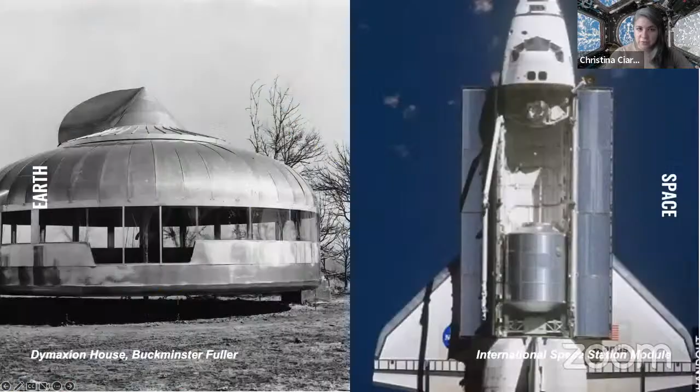How much does your building weigh? I started with this question from Buckminster Fuller. While it's a true and real logistical concern for the launching of a habitat and the weight of its payload for a spaceship, it's also a prompt for architects on Earth to question just how much material it has taken to construct our buildings. Have we been efficient with our materials? Have we tread on the Earth lightly? Did we leave a small footprint, whether that's a carbon footprint, water footprint, or some other footprint?

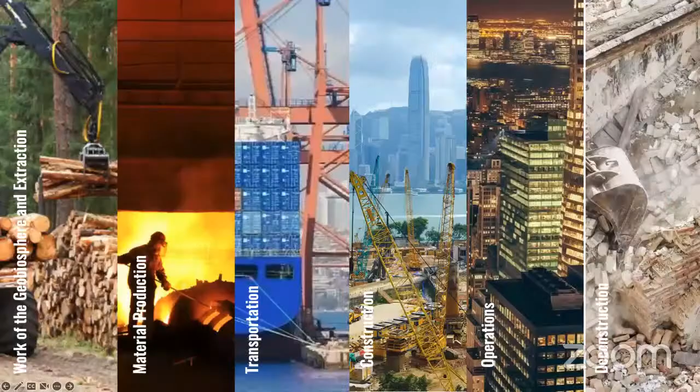You may have heard a great deal of discussion lately on carbon emissions and the need to reduce the carbon footprint of the built environment. For the building industry, this means thinking more deeply about the relationship to the material cycles of our planet and the means and methods which have dominated the way we source and build buildings.

From the work of the geobiosphere to make and produce raw materials, whether that be renewable materials such as timber, or non-renewable materials such as crude oil, irons, and metals. This is not just extraction through smelting furnaces or glulam factories, but transportation across material supply chains, supplied by faraway fossil fuels, with air refreshed from distant forests—resources that include both material energy to construct as well as to operate and support human life, both the necessary inputs and waste energies.

It's almost strange that the building industry here on Earth has only recently come across the need to use so-called life cycle analysis—the accounting of all the impacts of our building material production, construction, operational, and disposal practices. For what seems like quite a long time, we've been unconcerned with what is upstream of our design intent, taking for granted the standardization of materials and methods that make up current practice. Only recently have we begun accounting for all of these parts of our system.

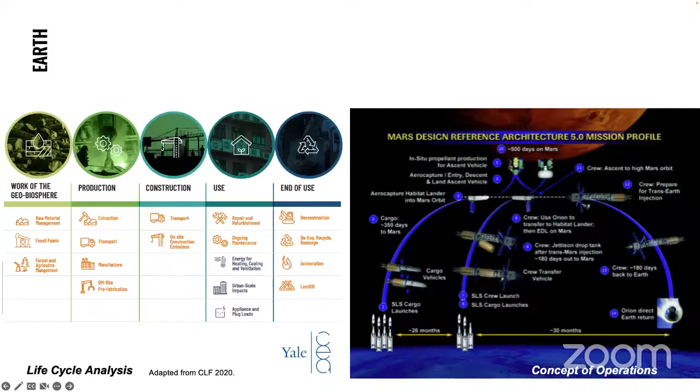Perhaps separated from the immediacy of connection to our resources—material, water, air, and biomass—we have forgotten our fundamental interdependency with the planet. And having forgotten it, we've continued to build as usual with extractive and energetically intense properties in a way that turns out is not sustainable. As we move further and further from our planet without the possibility to continuously resupply, architecture and building suits will need to be surrogates for all of the resources of an entire planet.

What we can say is that design for space is creating a human environment that operates within limited means and resources. This design exercise will provide feedback for Earth buildings, which must also act as though materials, energy, and resources were limited, which they are.

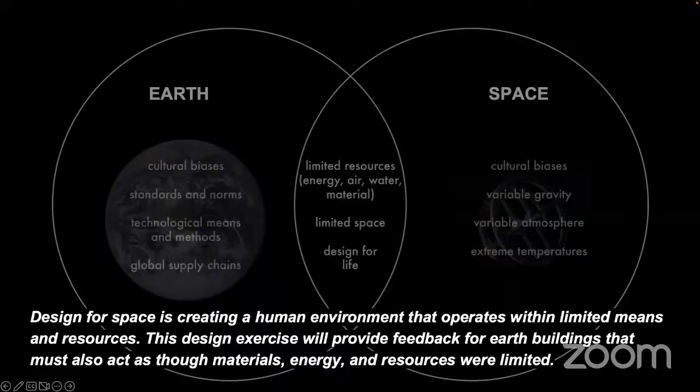In space, we come face to face with design requirements not unlike the sustainable drivers we're called on to respond to on Earth today: responsible consumption and production, clean water, sustainable cities, and smart communities. Our space habitat should be everything we hope to achieve in our terrestrial buildings, and it will be responsible for creating a circular economy in terms of clean air and water, food and waste recycling, and creating healthy environments for humans.

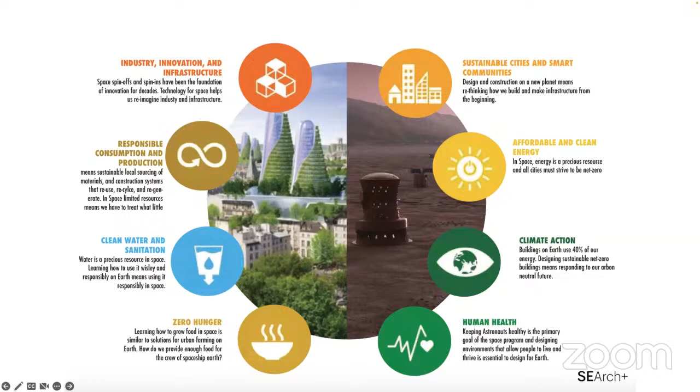So what I want to do with you today is a two-part presentation. The first part is to walk you through some of the highlights of the report that Sandra mentioned, Building Materials and the Climate, Constructing a New Future. Then I'll talk a little about why I think these same design principles are applicable to space applications, and what terrestrial architecture seeking to reduce its carbon impact on this planet means for space architecture, and what space architecture can teach us for Earth.

I'll start with the report and say that I'm one of many authors on this report. It was developed by the United Nations Environment Program, the Global ABC (the Alliance for Building and Construction), the Yale Center for Ecosystems and Architecture, and other partners. So we have a large team of industry experts, academics, and policymakers all responsible for this. I'm just one part of many, but I'm very thankful to be on that team.

So carbon, why are we so interested in carbon? Carbon compounds regulate the Earth's temperature, make up the food that sustains us, and provide energy that fuels our global economy. Most of Earth's carbon is stored in rocks and sediments. The rest is located in the ocean, the atmosphere, and in living things like trees. These are the reservoirs through which carbon cycles.

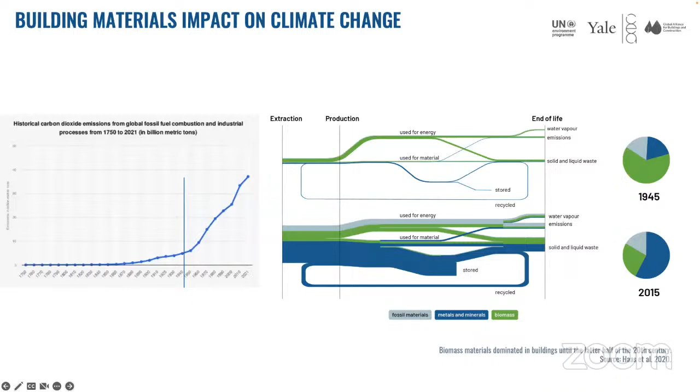Increases in carbon in the atmosphere are largely consistent with increases in industrial production and the use of fossil fuels. In the building sector, we can see that since 1945, we have dramatically increased the use of fossil materials, minerals, and metals proportionally, as well as overwhelmingly increased the volume of materials we use in construction in general. So we're both increasing the quantity of construction and shifting away from bio-based renewable materials to non-renewables.

As the world economy expands and living standards rise, the global use of raw materials is projected to nearly double by 2060. Under a business-as-usual scenario, floor space worldwide is set to double by 2060, and every 5 days, the world constructs enough new buildings to add another city the size of Paris.

Given the increasingly furious pace and scale of global construction, the challenge of shifting away from carbon-intensive materials and methods often seems daunting and potentially impossible.

But it's important to recall that even in the very recent past, building materials were not always carbon-intensive. Up until the mid-20th century, global material flows were extracted overwhelmingly from renewable biological sources such as forests and agricultural processes. By the late 20th century, a preponderance of metals and minerals constituted the most used materials for the first time in human history.

Just three materials, concrete, steel, and aluminum, are responsible for 23% of overall global emissions today.

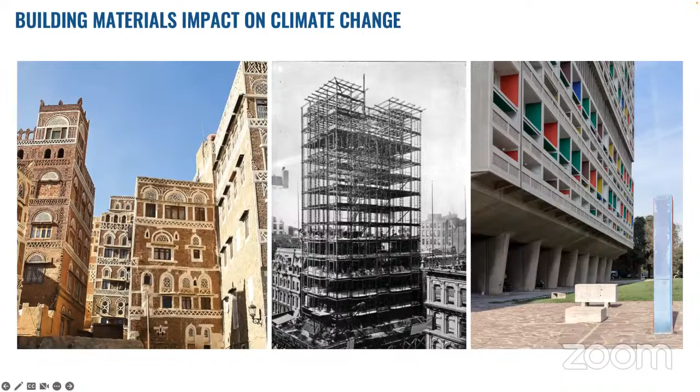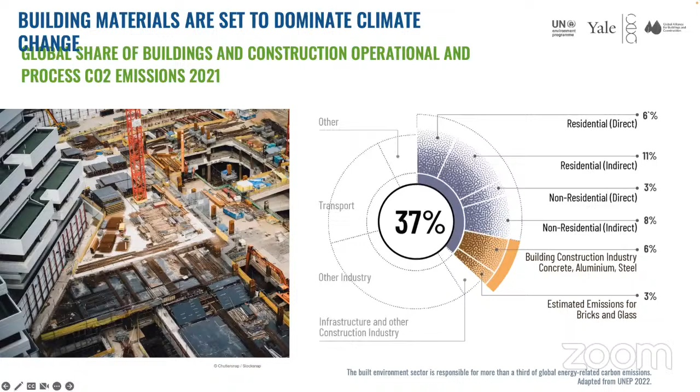The building sector is responsible for 37% of carbon emissions, both embodied and operational. Embodied carbon refers to emissions created from the production of materials, while operational carbon is the energy used to heat, cool, and ventilate our buildings and run electricity in them.

While overwhelmingly the focus has been on operational carbon and increasing energy performance in our buildings, because of that attention we are reducing operational carbon emissions. But at the same time, the percentage of emissions that have to do with embodied carbon is increasing.

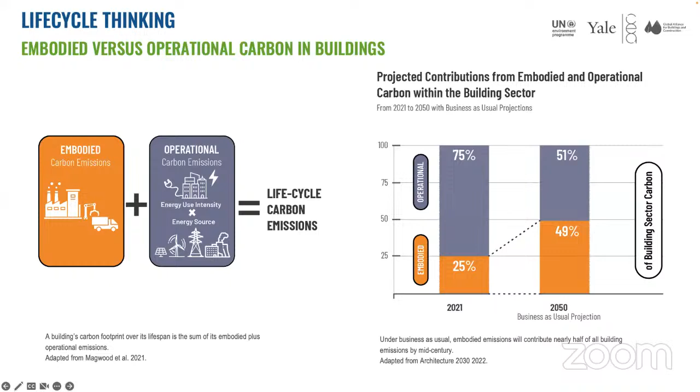So that's something we're able to sort of take a grasp of, but at the moment the building is constructed, that's when we really use the most of our embodied carbon.

It's really important to start thinking about the whole life cycle of the building. I think if there's one way of thinking that is most parallel with space architecture, it's this idea of life cycle thinking about everything from the time we extract all the way to the end of use or reuse, and where things are going.

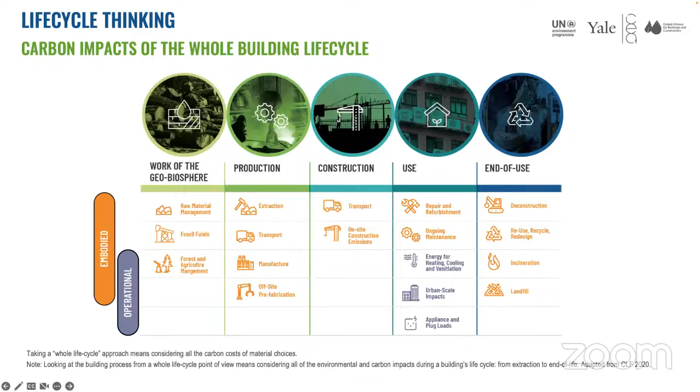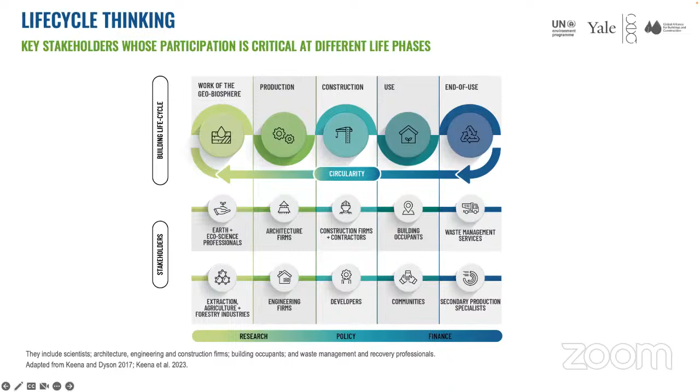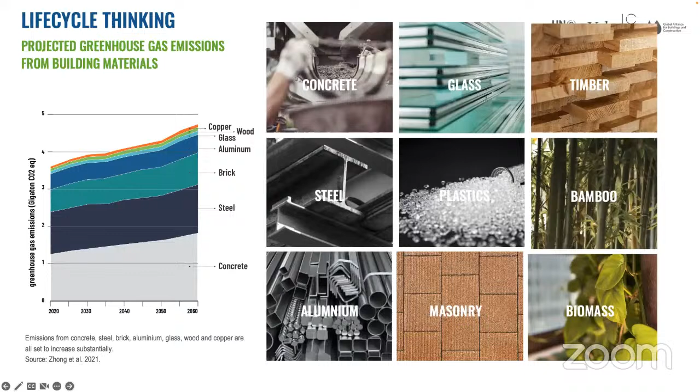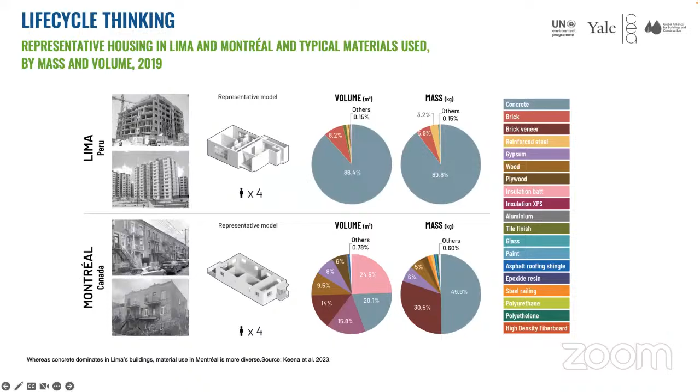There are many material streams relevant for the built environment, and we analyzed a few of them. As mentioned, concrete, steel, and brick are really the largest contributors. If we look at examples from a few different regions, we can see by both volume and mass that they are also the heaviest, and really make up the superstructure of the building. Superstructure is really where most of our carbon cost is coming from.

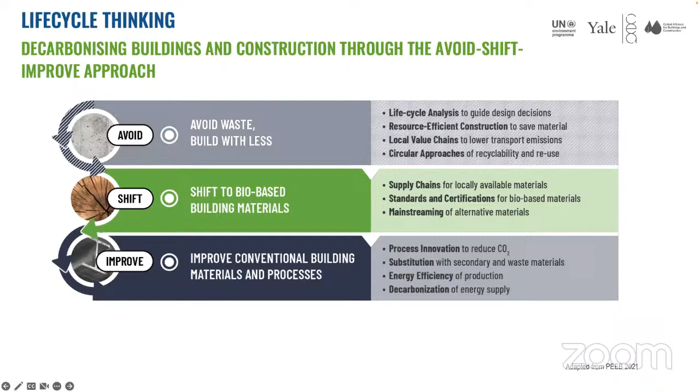In our report, we took an avoid, shift, improve approach. We are avoiding by building with less and building less. We're shifting to bio-based building materials, which are lower carbon, renewable materials, and we are improving conventional materials and building processes, trying to use the non-renewables we do use frequently in new and improved ways. We call this the avoid, shift, improve approach.

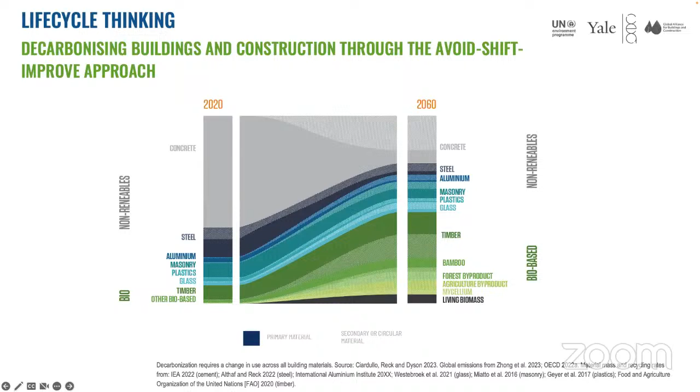As you can see, we're projecting a scenario in which we use significantly less non-renewable materials, and when we do, we're using them in a circular way—either design-for-disassembly concrete, recycled steel, recycled aluminum, or reused masonry. At the same time, we're projecting an increase in bio-based and renewable materials, but also in a circular way, not to repeat the problems of the past and continue with a linear economy for biomaterials, but really a circular economy for biomaterials.

A circular economy in buildings means transitioning away from the take, make, waste paradigm to reuse, repair, and recycle. In a circular economy, extending a building's life is the most valuable and least wasteful option.

First, reuse the buildings. The next best case scenario is to reuse components. This is substantially easier if design for disassembly has been incorporated into the early design stages of a building's construction, allowing for easy dismantling of materials and components so their value is retained. The next option is material reuse and remanufacture if needed, which prevents the need for extraction of non-renewable minerals for new material manufacturing, reducing embodied carbon.

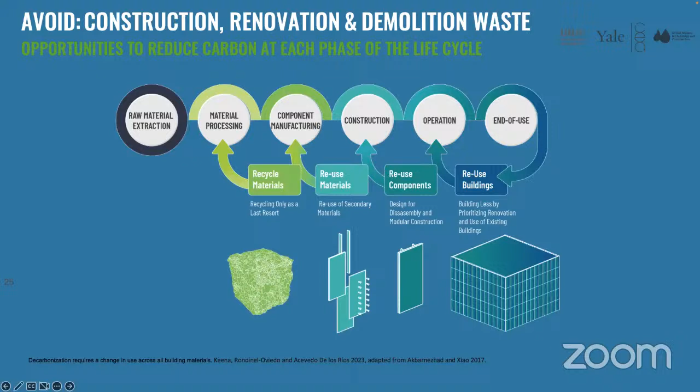In a circular economy paradigm of reuse, repair, and recycle, where waste is eliminated, the practice of recycling or downcycling becomes a last resort, as it is typically a product of lesser value.

There are opportunities to reduce carbon at each stage of building development. As with many things in sustainability, the potential to avoid is greatest during the planning and design phases. The first question is whether anything new needs to be built at all. Alternatives to new construction could be explored for existing buildings, which is the case for most mature economies, where a majority of the building stock already exists. Increasing the use of existing assets and promoting renovation and adaptive reuse is key.

In contrast, in emerging economies, much of the building stock is yet to be built. In this case, where new construction is a necessity, design should aim to maximize building lifespans through modular construction, incorporating design for disassembly, and promoting resource and material efficiency.

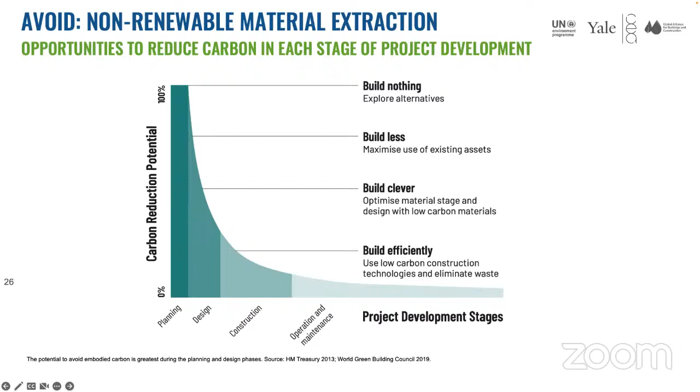At the end of life of buildings, the most common waste management strategy is demolition, followed by disposal of materials in a landfill. However, this results in a loss of invested carbon accumulated over the building's lifespan. Of the roughly 100 billion tons of construction, renovation, and demolition waste generated annually, around 35% is sent to landfill on average. So diversion and innovative management can greatly reduce waste.

Just to say that we can think about the idea of buildings being future material banks. So when we think of the lifespan of a building, 100 years, 200 years, think about the potential to use those as material banks for the future.

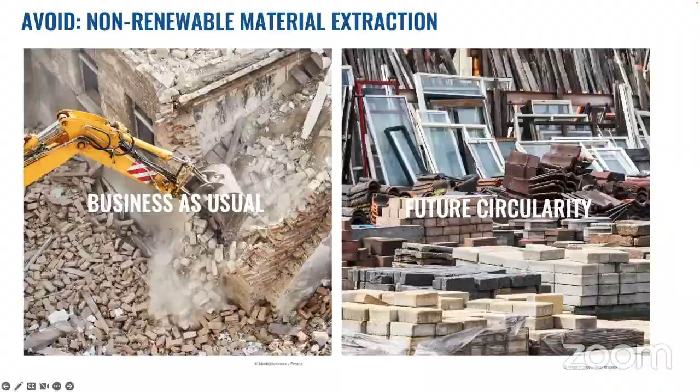Concrete is by far the most widely used construction material in the world, and it's responsible for the most embodied carbon in buildings. It's experienced tenfold growth over the past 65 years, compared with a threefold increase in steel production.

In many applications, concrete is used when lower carbon materials could suffice, largely because concrete has developed supply chain and infrastructure with ease of use and calculation. It's just the easiest thing for us to do. Many concrete buildings of less than 12 stories could shift to bio-based structural assemblies for everything but the foundation, if sustainable materials were available.

Cement is the binding material in concrete, typically comprising around 10 to 15% of the total. And cement is by far the most carbon intensive to produce within concrete. Cement production alone accounts for 7% of global CO2 emissions total. So not 7% of the building industry, but 7% of emissions total from the production of cement, the binder in concrete. It's also considered to be one of the most difficult processes to decarbonize.

This is because the majority of carbon emissions are released in the chemical process of converting limestone to calcium oxide. And so there's an urgent need to substitute these conventional cements with low carbon alternatives, such as byproducts from industrial, agriculture, forestry, and energy sources.

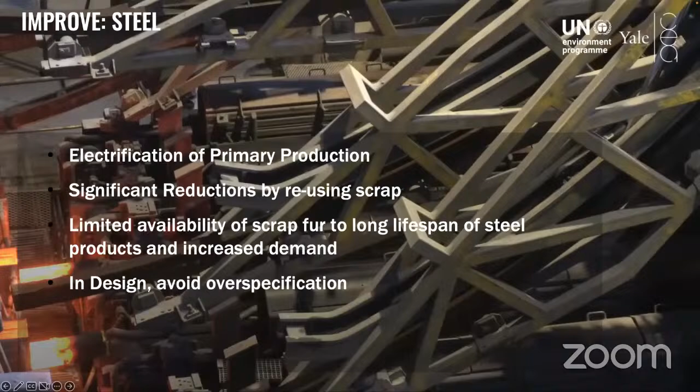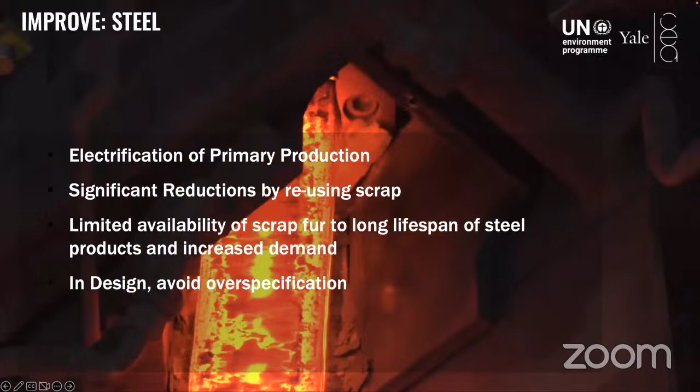Steel is the second most abundant material used in buildings, and steel production is responsible similarly for 7.2% of global greenhouse gas emissions. Most emissions are generated during three processes: when steel is produced from primary raw materials using a blast furnace, when carbon is needed as a reducing agent, and from the energy used to heat the melt.

The most significant strides in decarbonizing steel are electrifying the primary production, using renewable electricity, ideally hydrogen, to produce the steel. The biggest challenge to using secondary steel production, recycled steel, is the limited amount of scrap. There's a large gap between the supply of recycled steel and the rising demand. This is because steel is used in buildings for a long time, greater than 20 or more years, and there's rapid growth.

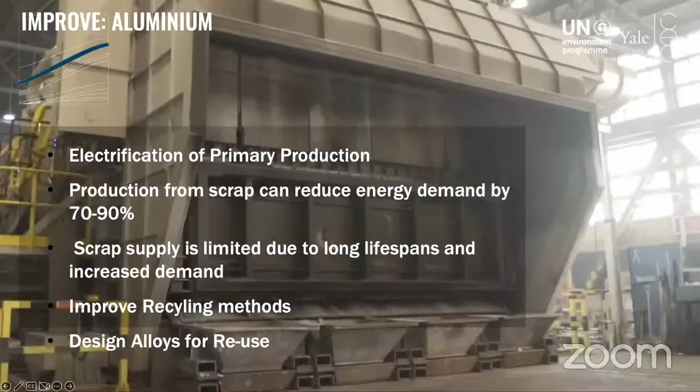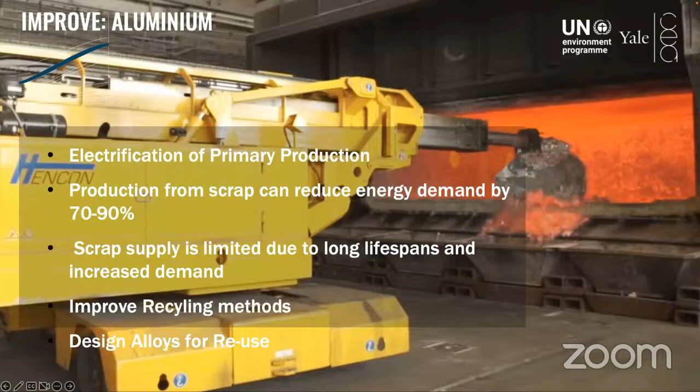So we have less steel to be able to mine for recycled content. In aluminum production, it contributed to over 3% of the world's direct emissions. Producing aluminum requires smelting, which is by far the most energy intensive step. But this also means that producing aluminum from scrap can reduce the energy by 70 to 90%. So the most significant thing is to focus on the reuse and recycling of aluminum.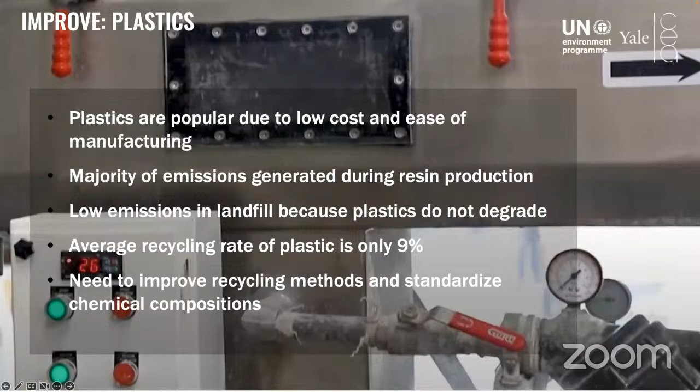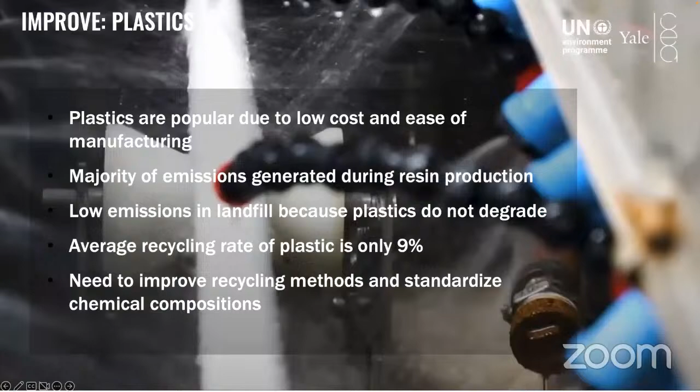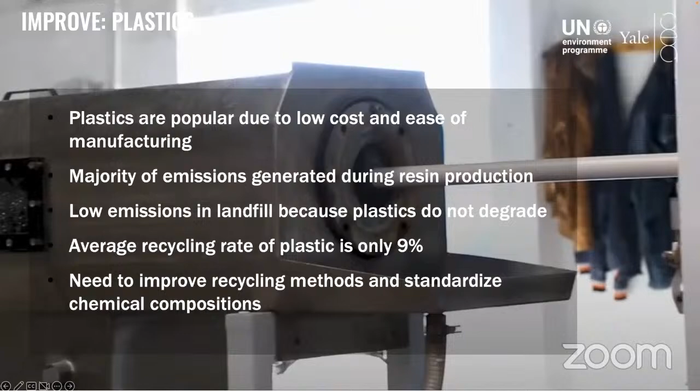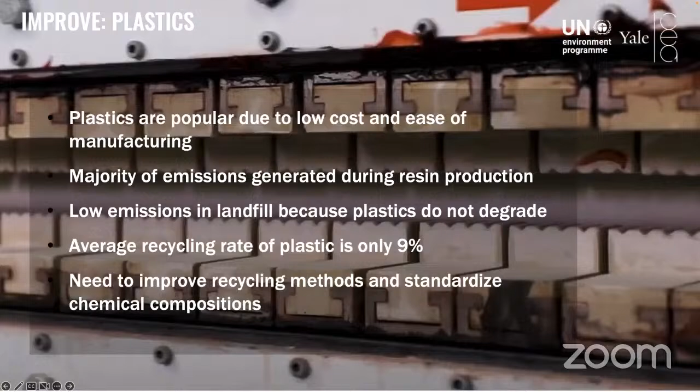Plastics are ubiquitous and popular due to their low cost and ease of manufacturing, typically used in buildings for piping, windows, and insulation. Recycling offers an opportunity to reduce the demand for new petroleum-based plastics, but the average rate of recycling is only 9%. Plastics' low cost and ease of manufacturing have resulted in many different chemical compositions that pose technological challenges during recycling. So it's harder to recycle a wide range of non-standard chemical mixes. Low plastic recycling rates need to be addressed through both the standardization of chemical compositions and improved practices.

To talk a little bit about masonry, at the end of the 20th century, structures made of earth-based materials housed around a third of the global population. And since then, it's fallen to only 8 to 10%. I believe a lot of the buildings that you may live in and that have stood the test of time are still made out of masonry.

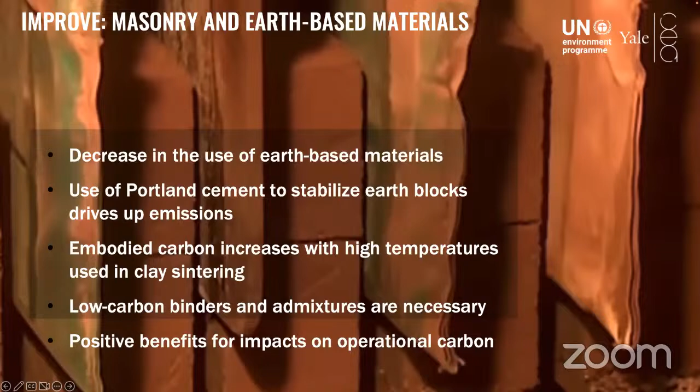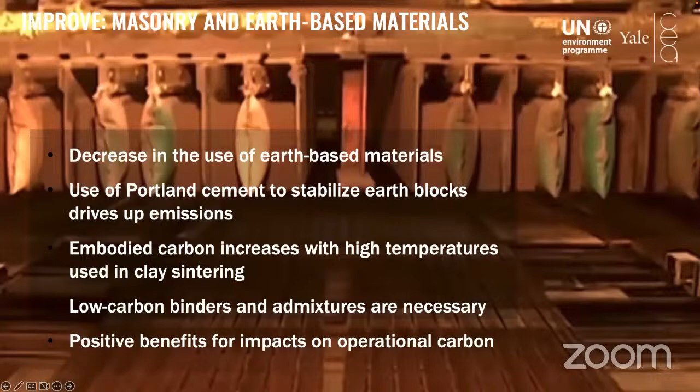More recently, the use of Portland cement to stabilize masonry has really driven the carbon footprint up, as well as firing methods with high temperatures for clay sintering. But to improve the performance and durability of earth masonry, we have to, similarly to concrete, think about low carbon binders, renewable binders, and potentially alternative methods that are more akin to traditional methods instead of high fire furnaces.

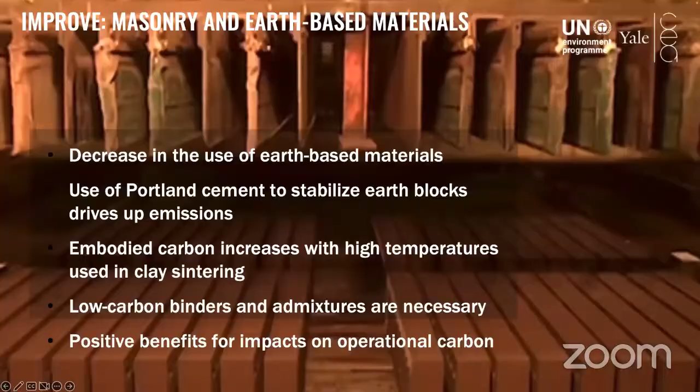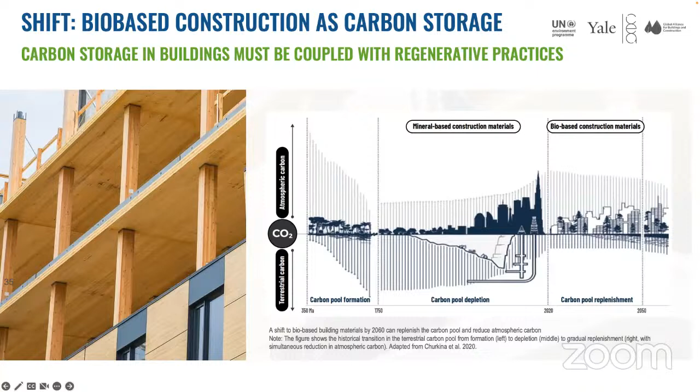One of the most promising parts of this paper is really about the transition, the shift to bio-based materials. This is both through their capacity to be processed at lower carbon footprints, as well as the possibility for them to sequester carbon as they're used. So timber is leading the way with advances in timber applications.

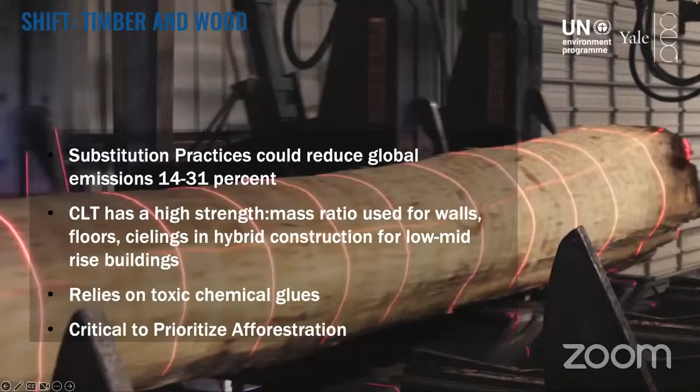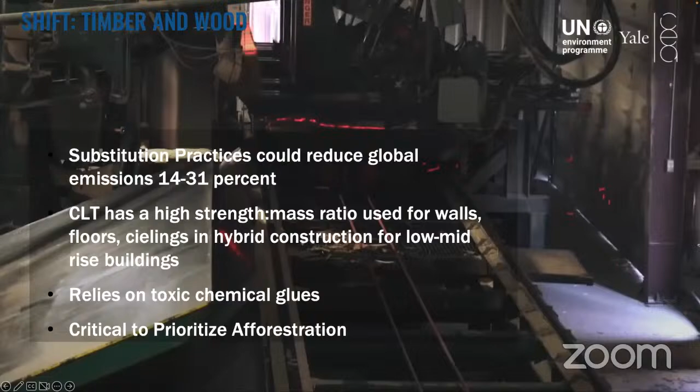Local and regional studies have found that mass timber could reduce global emissions by 14 to 31%. In the last two decades, cross-laminated timber has become an attractive alternative to concrete and steel because it has a comparatively high strength to mass ratio. It can be used for walls, floors, and ceilings. We should think about this as hybrid construction.

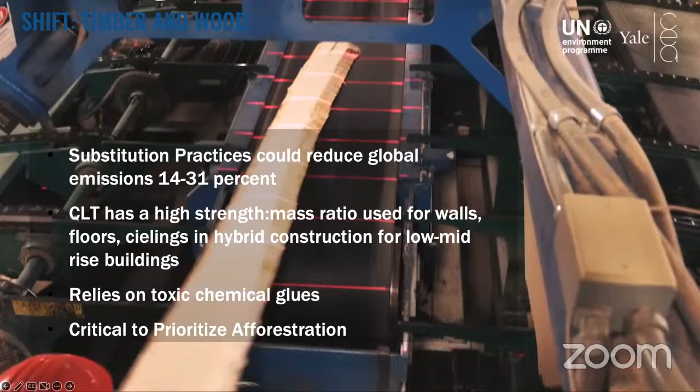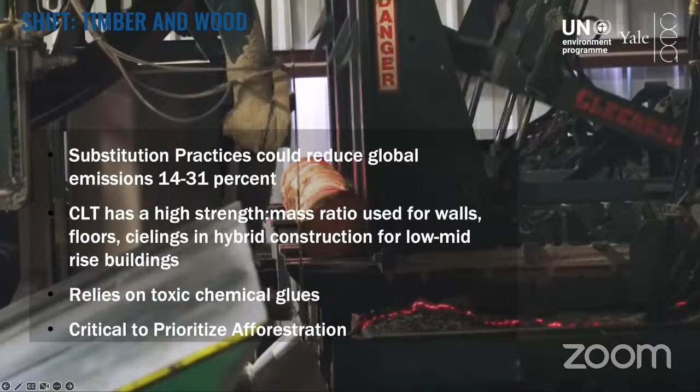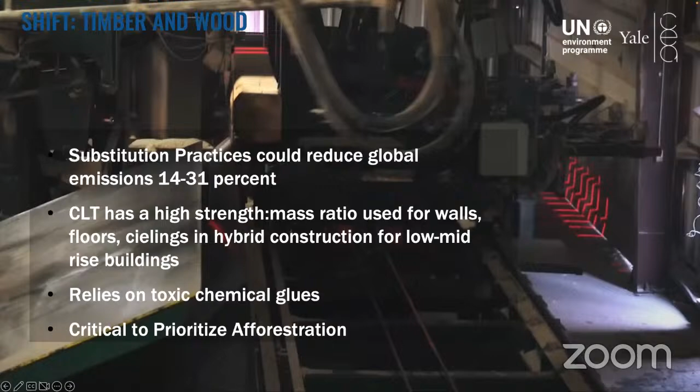It's not necessarily that we need a building to be entirely wood, but we can use it in combination with reinforced steel or reinforced concrete in a very efficient way. The manufacturing of structural beams, however, does rely heavily on toxic chemical glues, so we have to focus on alternatives to these glues.

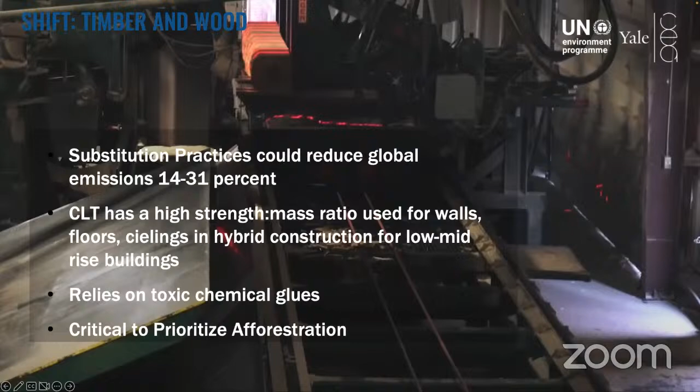At the same time, we need to be extremely careful about management of our forest systems. We don't want a situation where we're over-harvesting, so we need to be incredibly diligent about afforestation practices and really rely on efforts to keep the pace of forests going at the same pace that we need those materials.

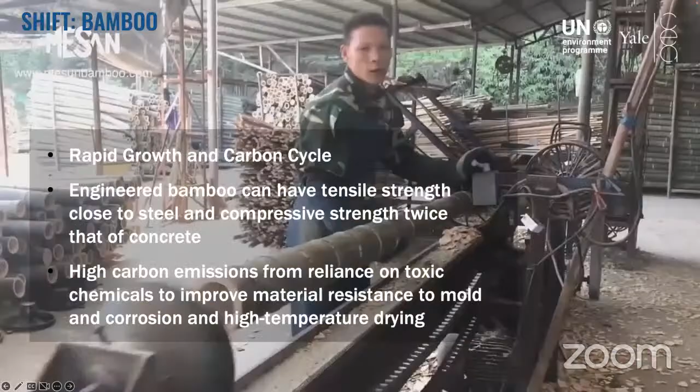Aside from timber, bamboo is a frontrunner for building materials due to its rapid growth and carbon cycle. Advances in bamboo building materials have paved the way for the use and integration of structural and engineered bamboos, with a tensile strength that could be close to steel and a compressive strength twice that of concrete, and can be used for columns and beams.

But similarly to timber, much of those bamboo products are generated with toxic chemical treatments, which do drive up their CO2 emissions, making them, in this case, almost as carbon intensive as steel. So we need to really focus on alternative ways to create those products without these glues.

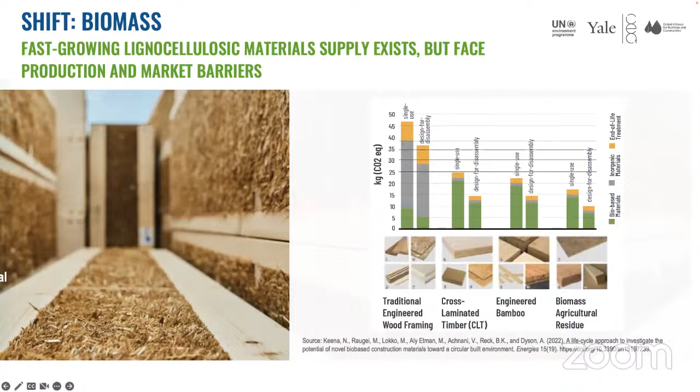Biomass - this is agricultural waste byproducts. Each year, an estimated 140 gigatons of biomass is generated worldwide. Relative to the current end-of-life pathways for biomass, landfills and incineration, we can really take advantage of the value in these systems, and we can talk about different opportunities that forest byproduct and agricultural byproduct really have in the market.

We wanted to throw in the idea that materials could also be living. So we've seen an increase in the use of green walls and green roofs and vegetation integrated into buildings. We want to think about this as a material alternative. Of course, there's a balance between operational and embodied costs.

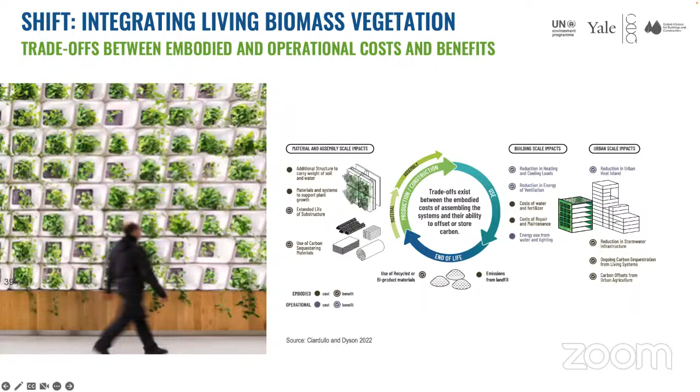Often the idea of adding weight and soil to the building, increasing the structure required for the building, is sort of a negative, but the idea of potentials over time for either decreasing the energy needs for the building with vegetation acting as insulation or as thermal mass, as well as the potential for carbon sequestration over time if implemented at scale, is something we really wanted to consider. So this is part of the discussion - space.

Now that we've looked at the issues of building materials and construction for Earth through the lens of carbon, it's kind of difficult to understand, well, what does this have to do with space construction? We're not interested in climate change on Mars. That's really, it's hard to make that leap.

However, I think that, as we've said, this idea of thinking about the whole life cycle of the building - thinking about where your materials are coming from, where your energy is coming from, well, what are you going to do when that material's life has ended - these are all questions that are really necessary for Earth and space. And I want to talk about a couple of different categories that we might think about.

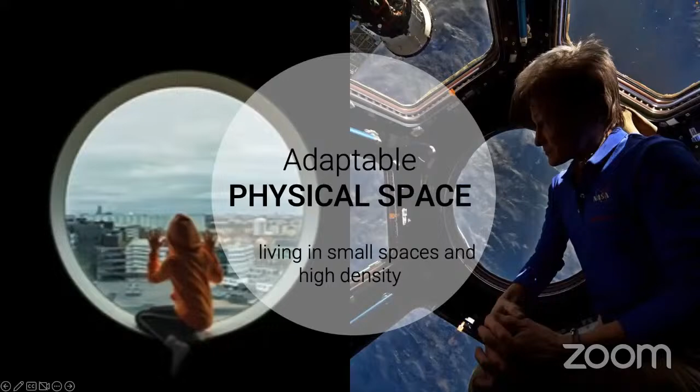The first is adaptable physical space - so living in smaller spaces, or in other words, at higher densities. In space, human beings will spend 100% of their time indoors. Our current space habitats are constrained by volume and weight. There's only so much area we can build. And so for now, we've lived in space, in small spaces.

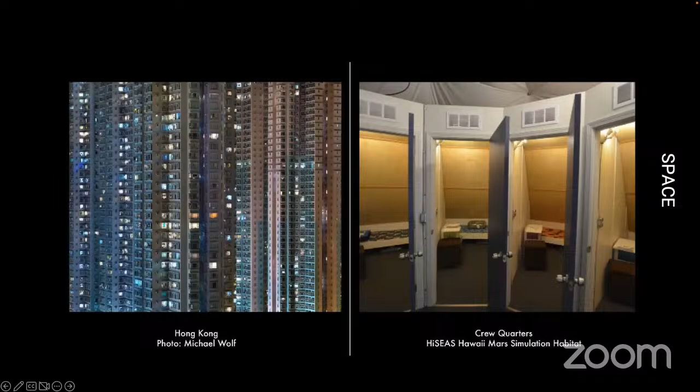So physical space is also a resource which we have less of, in space and on Earth. Coming to terms with how we view minimal habitable standards on Earth is a serious question for architects today. To what extent are we influenced by cultural norms of habitation sizes? Where do these cultural norms come from? Is it from the critical size of the human body? Is it more cultural?

Meeting the demands of affordable housing for a rising population is predicted to double the amount of constructed floor space. That's why we're constructing the equivalent of the city of Paris every 5 days. Uncomfortably, in the last decade, in the developed world, the standard of living has risen such that we have increased our desire for more build space per person, and the amount of living space per person has also doubled due to aging populations and more people living alone. So building more means using more land, more materials, more energy, more resources per person.

So many in the building industry have advocated for a shift in consciousness in relation to the expectations of floor area. And this is a very difficult thing to start to talk about.

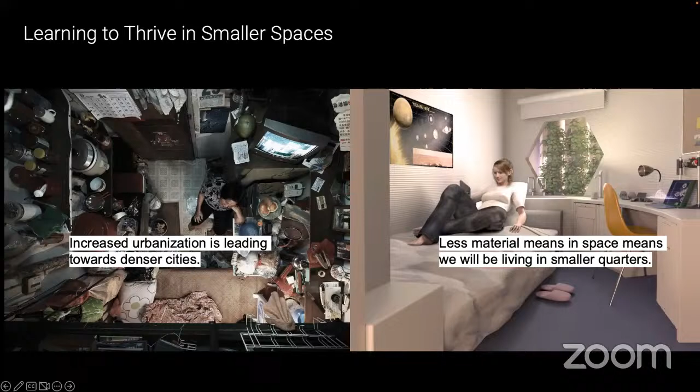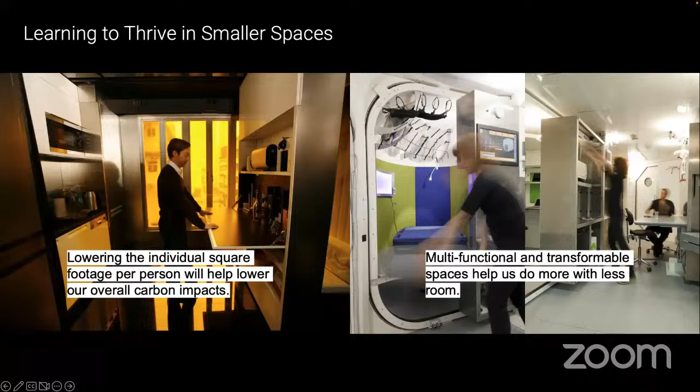Learning to thrive in smaller spaces might mean we need to become more creative. It's not about living ascetically, but about living well and fully within limited means. This transforming apartment in Hong Kong on the left pulls out all the functions of a home in the size of a small studio. It's very similar to this building on the right, a multi-purpose space required for small deployable habitats. This is from Liquifer's SHEE Habitat.

The next thing we could talk about is deployable construction. The discussion around design for disassembly of components, prefabrication, waste reduction, and reduction in on-site construction emissions have many similarities with space construction. In the 90s, NASA developed a useful classification system describing Class 1 habitats as fully outfitted and flown and assembled, Class 2 habitats as deployed and assembled on site, and Class 3 habitats primarily based on in-situ resources. I would say most recent habitat concepts over the past few years have really been somewhere between a Class 2 and a Class 3 habitat.

These classifications are useful when we think about Earth and space synergistic applications, not so much as naming a particular system like additive manufacturing, but as the performance of deployability and on-site precision.

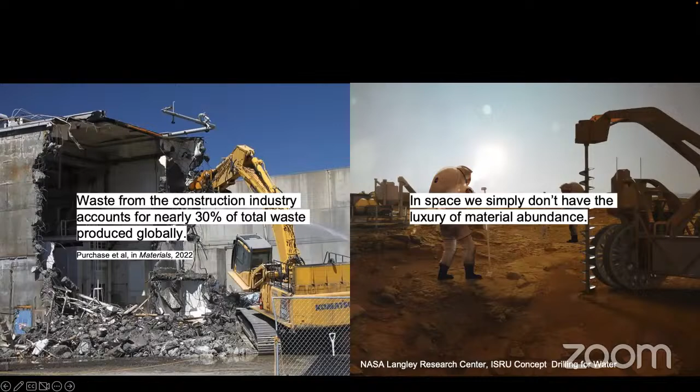One of the most significant environmental impacts of the building industry is the production of a significant amount of construction waste. It's estimated that building waste occupies 30% of the world's landfills. We're not maybe concerned with waste buildup on the moon or Mars yet—maybe we should be—but we are interested in the use of less materials overall. Some of the key requirements for pushing Earth towards a circular economy is reduction of building waste, both at the construction site as well as at the end of life.

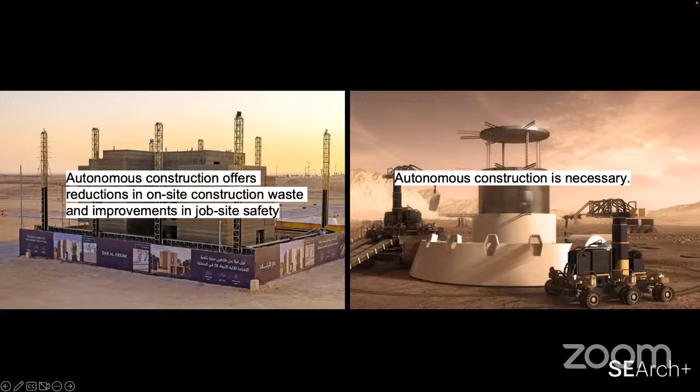Automating construction in space is necessary to be able to construct before humans arrive, and no humans on the job site means less accidents. Additive manufacturing is one means of building autonomously, but the benefit for Earth is the ability to reduce on-site waste both through precision modeling at the design stage, as well as precision construction on site. So if we're going to use concrete, we're going to use the most optimized, limited amount of it as possible—we're not going to waste it in the design phase, we're going to be optimizing for it, and on site, we're not going to be wasting it.

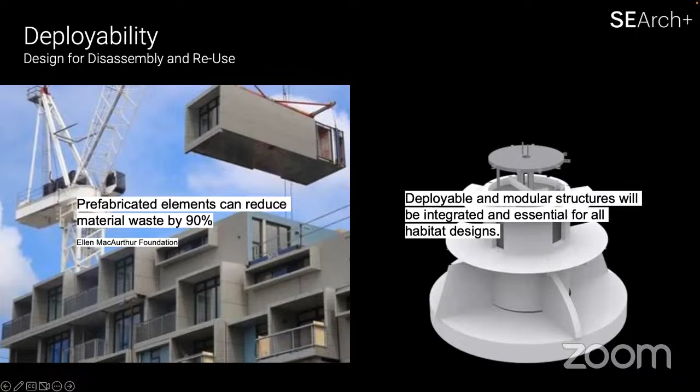It is quite advantageous that Class 2 deployable habitats made of deployable parts assembled on site is more of a near-term reality, both for Earth and space. On Earth, we could very much benefit from prefabrication and assembly of systems that have been manufactured off-site. This also will reduce material waste during both the production of materials and the construction waste at the site, as well as designing for disassembly, which means that at the end of the building's lifespan, we can potentially reuse components in a way that doesn't devalue those materials.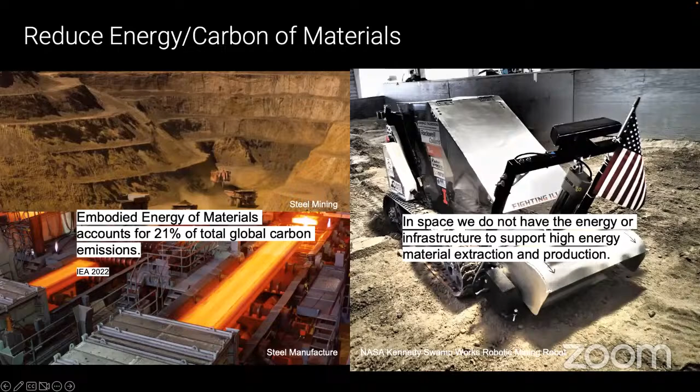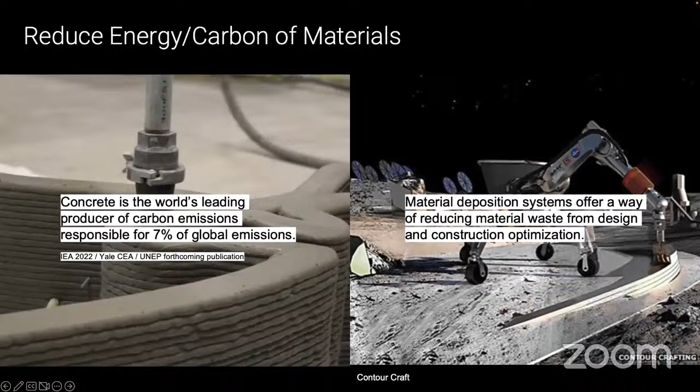Material intelligence: in space, we do not have the luxury of mining infrastructure, transporting, or smelting furnaces. We only have the very precious equipment that can fit in a few transports, so it requires us to think differently about how we source and produce those materials, which is really interesting. While we've discussed the benefits of additive manufacturing, we still can't escape that concrete is by far the leading contributor to carbon emissions.

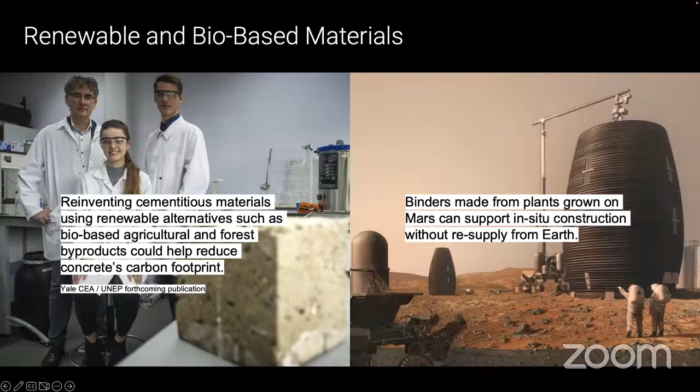So we've discussed that what we need to do is think about finding alternative binders, including circular and bio-based products. On the right is a structure designed with a plant-based composite, with the hope that within our spacefaring infrastructure, we might imagine growing plants not only for food, but for fiber as well. Similarly, on the left, we're talking about using cementitious materials from renewable alternatives for concrete on Earth. Sourcing one's own renewable materials offers us a great glimpse into what it might mean to work without extractive processes.

Would it be more effective to grow our own materials in space? We do rely on fibers for so many of the products of life, clothing, fabrics. For long-term habitation, we might find that renewable and grown sources of material are necessary.

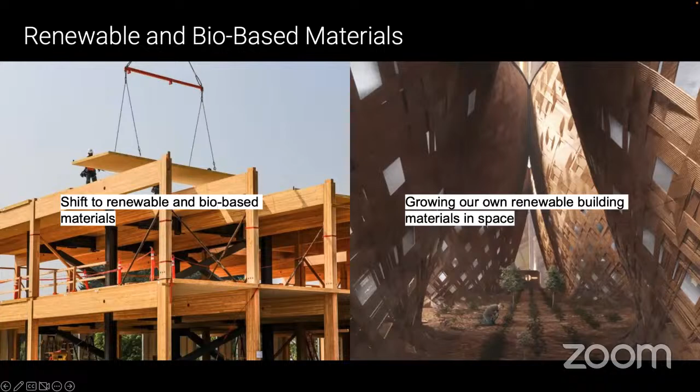On the left is an image of CLT construction, and on the right is an idea of a bamboo environment for Mars, where I'm not quite sure about whether we can use it to enclose our structures. Potentially, if it has some tensile strength similar to steel, why not investigate some fibrous materials?

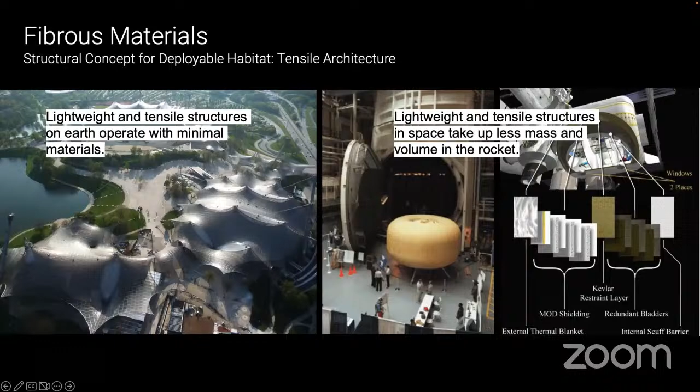Perhaps in the more immediate future on the Moon or Mars, we would not be concerned with metals and minerals, but with the energy and machinery required for processing those materials, so we can create synthetic fibers. We can talk about creating synthetic fibers as well.

Energy and passive strategies. So what does operational energy have to do with the embodied energy of materials? It's really deeply embedded within the use of materials, the impact that those materials and formal choices have on the operational energy of the building.

In millennia past, we had vernacular architectures which showed us passive means of adapting to our harsh climates. The use of masonry structures was not only to hold up a building, but really to regulate temperatures inside the building, especially in particular climates.

So here in the Mars X house on the right, we looked at these deep overhangs and horizontal lighting, letting light in from the side to shield us from solar radiation, which was very much inspired by ancient Native American cultures, which used the natural overhangs of cliffs to protect their buildings from the sun, using adobe materials that would absorb the heat of the day and release it over the cold desert night.

So the relationship between materials and building energy use is critical. What would it mean for us to return, instead of relying on machines, HVAC, mechanical equipment to heat and cool our buildings, really returning to passive strategies, using the intelligence of form and materials to respond to our environment?

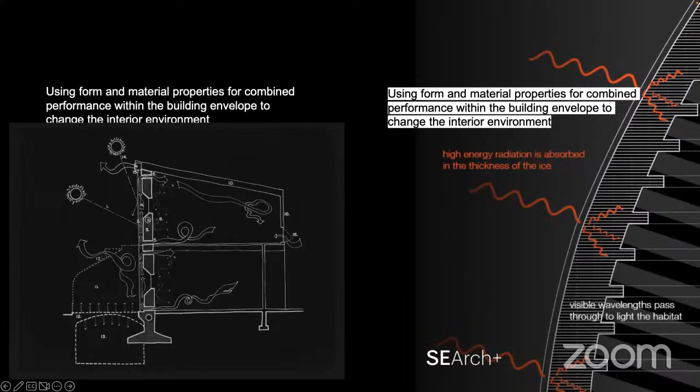And finally, I just want to touch on, we spoke about a shift to bio-based solutions, and this also applies to a shift to include circular and renewable resource management, water, air, and the like.

In space, we don't have the luxury to turn on the tap, plug in the computer, or breathe the fresh air. This reminds us that at home, as far as we can, we should contribute to the sustainable use and reuse of air, water, and materials within our built environment, and integrate the biological processes on which we depend into our urban futures. So the way we regenerate air, water, and nutrients is through our interactions with plants and microbes.

Similar to the idea of thinking about living biomass, vegetation as materials in our buildings, the future of both our urban futures on Earth and in space will really have a necessity to look at that interaction between human, plant, and microbial ecologies together.

So that's where I'm going to leave you, as sort of all of these thoughts, food for thought, as you go out and design the future on any planet.

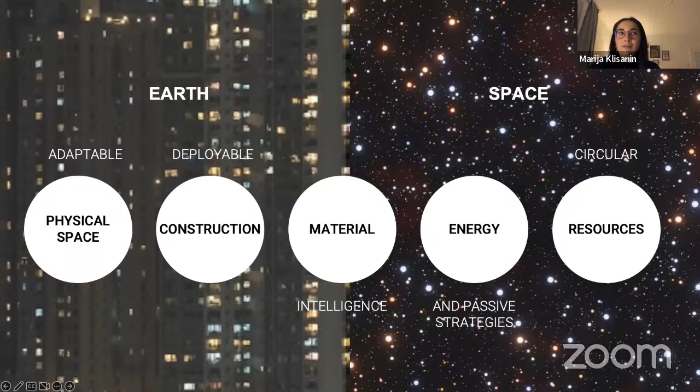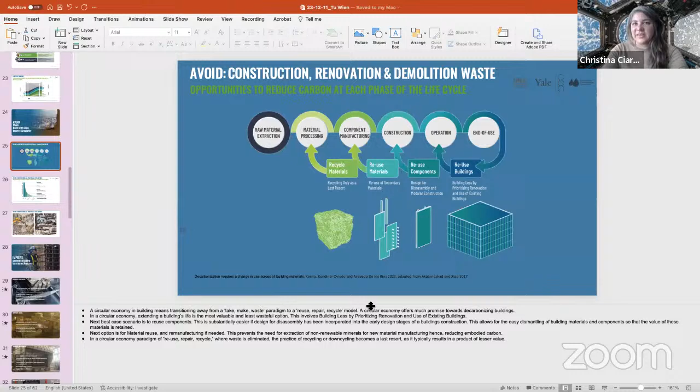That's a great question. As an architect, I also want to have the freedom to use materials in the way that I want. So the idea of having to use something that was already in a particular shape or form is kind of off-putting. But the reason we talk about this is because increasingly over the life of the building, we're putting more and more embodied energy into it, and the more we can use those materials in the form we've already invested energy into, the more we're saving.

Obviously not every building can be made of modular components, there is an amount of freedom, but can we think about how we could standardize some components and parts so that we can reuse them? In this picture, the idea is that the highest use is to reuse the building itself. It's more difficult and more energy intensive to take that building down and put up a new one, even if the new one is more energy efficient and more beautiful.

It's just a lot of energy to take that building down, plus all the energy that went into producing new materials to make something new. So the first thing we want to do is reuse the building itself, to adaptively reuse it, to change the way it functions inside. The next highest use is, okay, if there are modular components, are there modular panels, wall sections designed for disassembly that we can reuse in a different way in a new building? And how do we change the way we design to work with standardized components while still being as innovative as we want with our buildings?

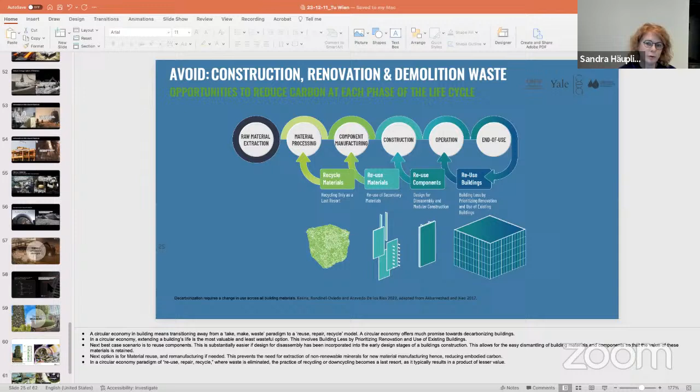That's why your Ice House project is super interesting, because that was also, I think, something an architect in an interdisciplinary team can do when they know the environment - they come up with new ideas to use materials differently. I think this Ice House concept was a very innovative approach to tackling an issue, because right before we had a talk by Peter White, and we know the radiation problem is not solved. So you showed a wonderful way how architects can use creative ideas to find new solutions.

Absolutely. And what was really interesting about this is that we took water in a very first-principles way. We were collecting water in the Martian atmosphere - it would sublimate if it was exposed. So the idea was collecting it as a gas as it sublimates, storing it in its gaseous state. There was even an idea of just releasing the gas into a pressurized dome where it would accumulate on the surface of the dome and turn hard into ice. In this case, we also applied it as a liquid and then it froze on contact - or that was the test that we did.

And this material is very easily reused - there's energy that it would take to melt that back down. But the idea of what are the basic fundamental properties of materials that you can manipulate and play with, it was very freeing. When you're in the space context, you're asking: what can we do? What can we think of? There isn't this sort of immediate reaction of 'it's concrete,' 'it's steel,' or 'it's clad steel,' or whatever it is - that reaction that there is on Earth.

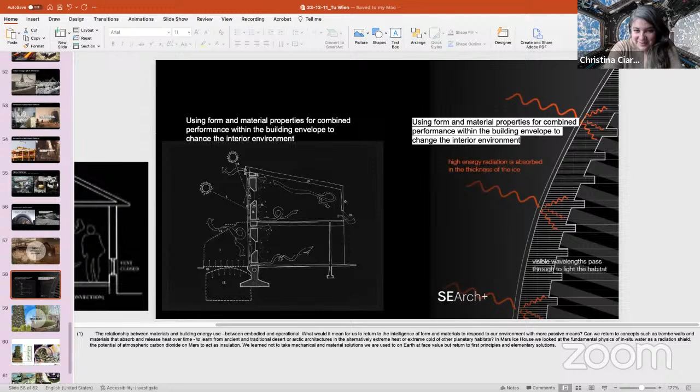Are there any other questions from the students?

Related to your work?

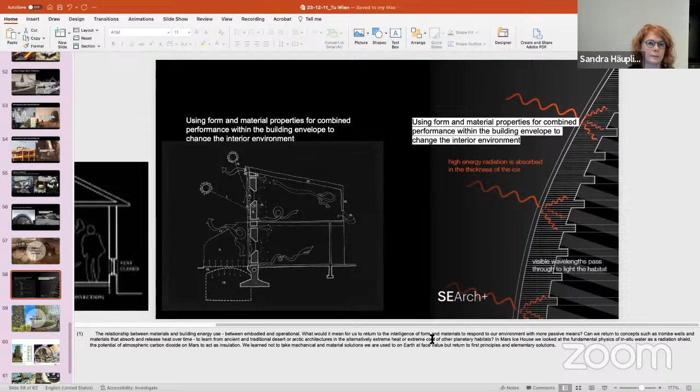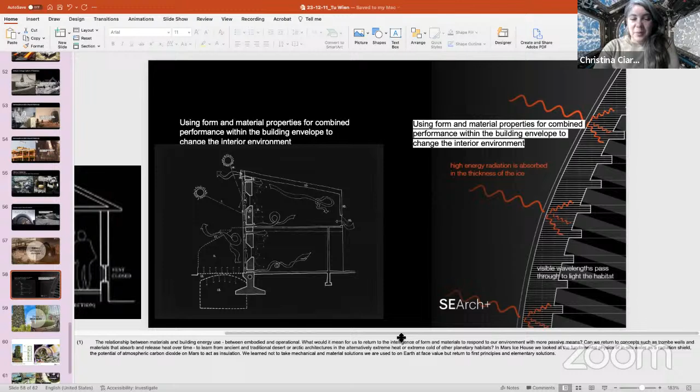It's a lot. I encourage you all to read the building materials and climate.org report, and take a deep dive into that. I'm wondering for all of you, how it changes your perspective, if it changes it. Is this something you've been thinking about all along? I'm sure Sandra has been directing you quite well. I'm interested to know your reactions on how it might change or not, or how it's been prevalent in your designs already.

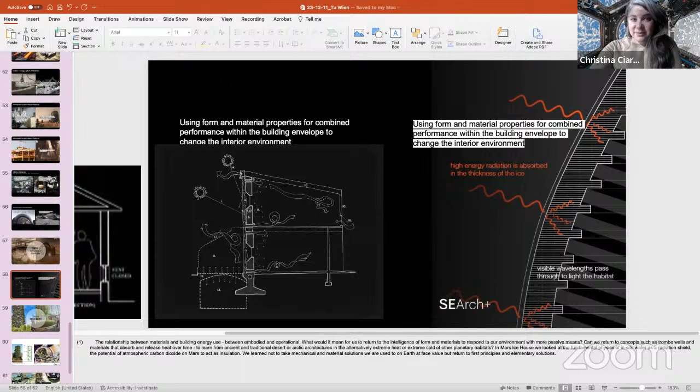All right, who can answer this question, please? One answer. How does the thinking about sustainability and the challenges on Earth challenge your design work? I know you're all working on that, so please give me one answer.

Maria, I ask you then, please. I'm thinking, and I remembered what you told me, Christina, that it takes also a lot of creativity to recycle something. So I think when we plan or design something, it takes a lot of creativity, and with all the other input, it gets more, like you think out of the box. You're not inside it, then something like that. I don't know.